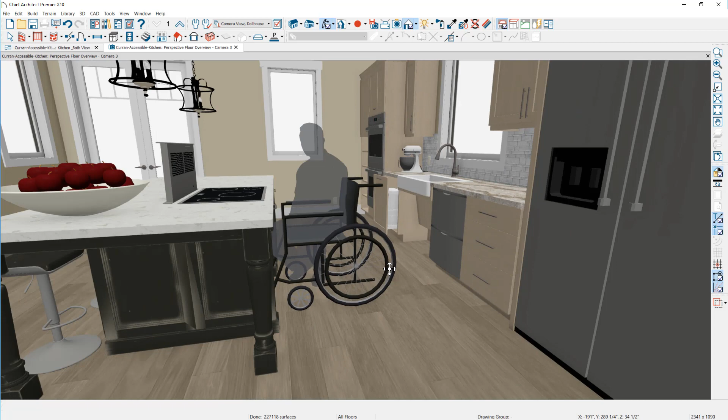In this video I'm going to cover the process of creating an accessible kitchen that meets the National Kitchen and Bath Association's accessibility guidelines. The ADA covers commercial guidelines but not really residential guidelines, so I'm using those available from the NKBA. There are three important areas for this kitchen that I'm going to focus on.

First is knee clearance for both the sink and the cooktop. Next is creating a wide aisle with a turning radius. Let's get started with a new plan.

Now that I have a new plan open, let's review a few of my settings here. First, I'm using the NKBA annotations available through the drop-down. Next, I'm using the layer set for kitchen and bath. And finally, I'm using my saved plan view for kitchen and bath.

The saved plan view that ships out of the box of the program controls both your layer set and your annotation set. So let's get started by using our exterior wall tool.

I'm going to come in here and just create the shape of our design. I'll right click and create a rectangular room. You'll notice the wall fill layer is turned off in the kitchen and bath layer set.

Once I'm finished, I'm going to select inside of this room, and notice in my lower edit menu down here at the bottom there is a feature called the automatic NKBA dimension tool.

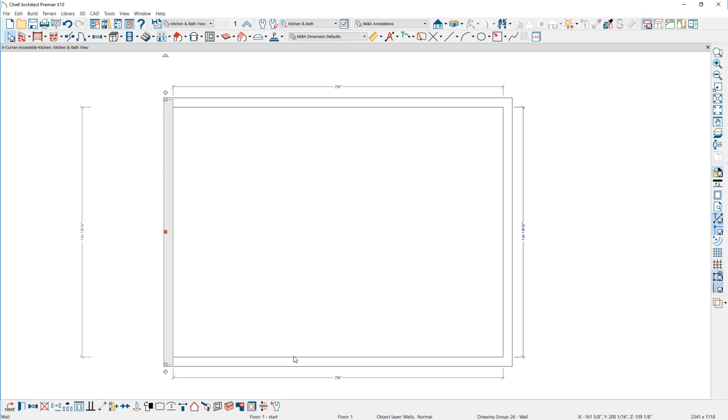These dimensions go wall surface to wall surface. I'm going to select one of the walls on the side here, highlight the lower dimension and type in 256 for inches. Then I'll come over here and select the lower wall, select this dimension, and put in 203.

Once I have my dimensions in place, I'll just refresh my dimensions by using that same tool, and now I kind of have the space that I want.

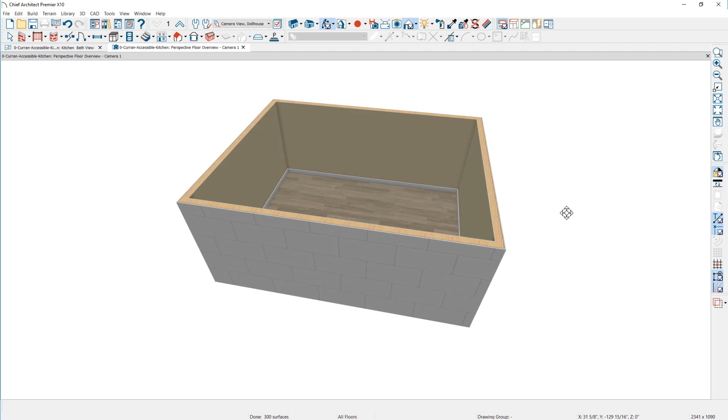You could take a 3D view and let's take a peek. When you take a 3D view, these are going to use the defaults you've set up for your plan. Notice that the exterior wall type is of a certain color and style, as is my interior floor coloring and walls. I'm going to go ahead and place my doors and windows while I'm in this view.

Let's place a window off to the side over here. I'm going to place one for our sink right in this area. One more off to the side over here. And then finally I'm going to place a door back in this back wall.

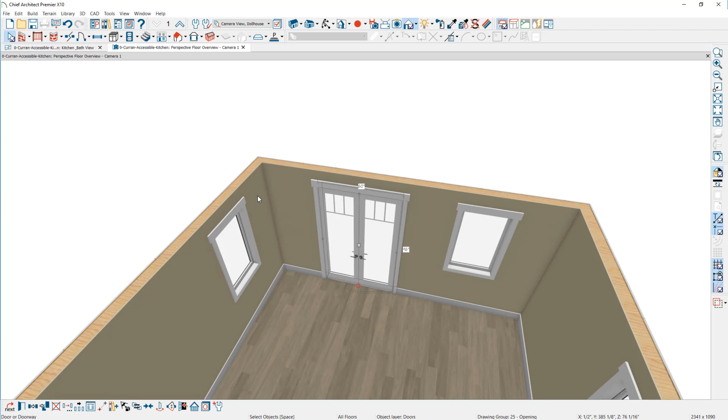We'll just use our door tool. I'm going to click and place the door, and I'm going to make this a little bit wider, at maybe 60 inches. Now I'm going to return back to the plan view and let's finalize our dimensions for those objects.

The window on the lower wall is going to be our sink window. I'm going to make some adjustments to the width and the height, so I'll set this to be 48 by 54. Once I have that adjustment, I'll select inside the room and update those dimensions.

Next, I'm just going to move my way around in a circular fashion and update the dimensions for each one of these objects. I'll click on the window and then put in the value for the dimension, and just work my way around.

For this dimension, I'm going to set this to be 51 3/8, and for the door I'm going to set this to be 48 inches from the window. And finally, for this window over here, I'm going to set that to be 9 inches.

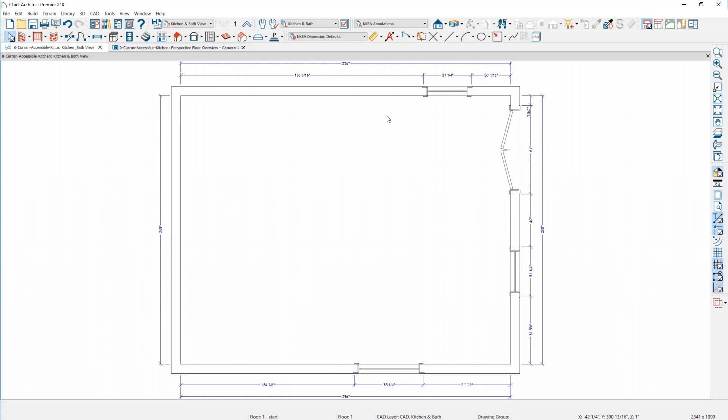So I have most of the dimensions for the room. One of the things I like to do if you're just going to be doing one wall or maybe two walls is temporarily create a view in here.

I'm going to use the break wall tool, which you'll see in the upper menu. I'll create a notch somewhere along this wall right in here, then select these two walls and mark them as invisible. That way when I take a 3D view you won't see those two walls, and it makes it very easy to look inside the design.

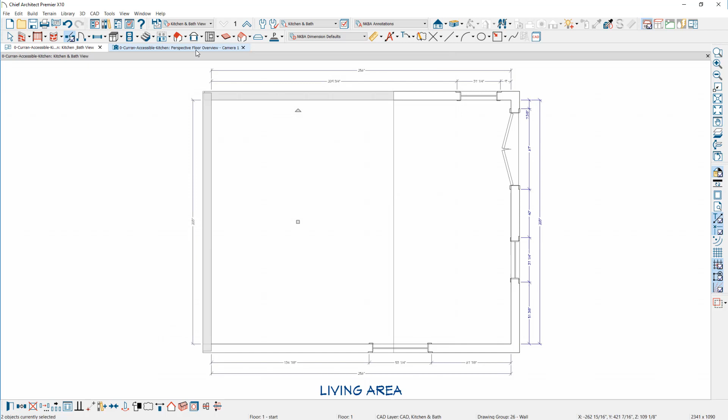Let's go back to the 3D view here. Now you can see this space, and we can zoom right in and begin our design work. I'm going to begin the design work in this perspective view.

A lot of times I'll work in a plan view and elevation view, but this is an easy way to start the process. I'm going to begin with placing a full height cabinet right in this area, and slide it up against the wall until it bumps. Next I'll double click on that and make some modifications.

On the general panel, I'm going to mark the width of this to be 21 inches. Press the tab key so you can see it update. Then on the front of the cabinet, I'll click on the lower face item.

I'm going to change this from a door to an opening. Then on the upper door, let's change that from an auto right to an auto left. And I'm going to set the item height to 34.5 inches.

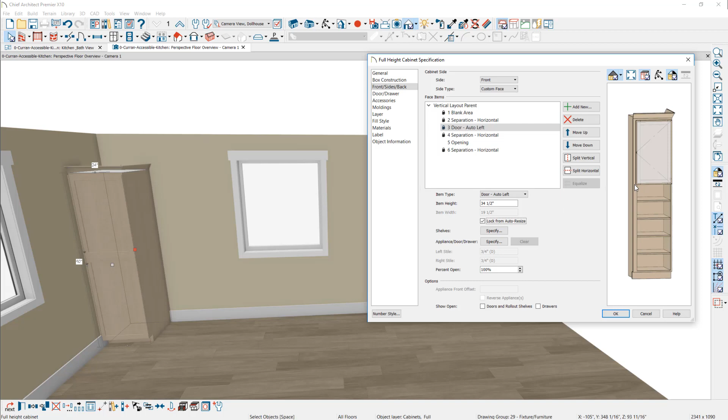That way it's going to line up the bottom of it with a few of the wall cabinets I'll place here in a minute. Just go ahead and bump that back against the wall. I'm going to place one more full height cabinet that will be used for our double oven.

Go ahead and click on that. I'm going to resize it to 30 inches. On this cabinet I want to make a few changes. First, I'm going to change the upper drawers.

Let's go ahead and set this to be a dimension of 23 7/8. Press the tab key so you get a preview.

On this lower face item, I'm going to split this horizontally, and the center one I'm going to mark as an appliance. Let's go ahead and change that. Then on the item height, I'm going to put in the specs for the specific appliance.

These are the finished dimensions typically. Also make sure that you lock this from resize, because we do not enforce any of the settings for specific appliances, so it's your responsibility to use the spec sheet and the finished dimensions for this.

On the item above it, the separation, I'm going to change that to a blank area, and set that to be 3 inches. Finally, on the lower section at the very bottom, I'm also going to make that a blank area. There's really no reason for the separation in this area or this area, so we'll simply remove those.

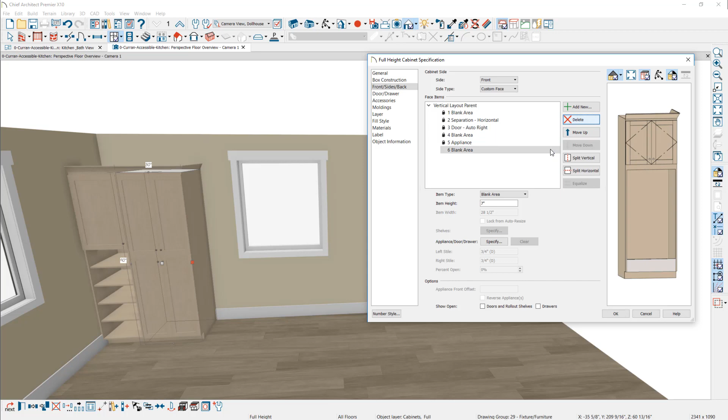On the appliance, I'm going to browse out to the library and look for the Wolf Double Oven that I'm after. I'll scroll down and look for the Wolf catalog. Let's scroll down a little bit further.

That should be under the Wolf Cooking section for ovens, and I'm going to use this built-in double oven, and now you can see the preview.

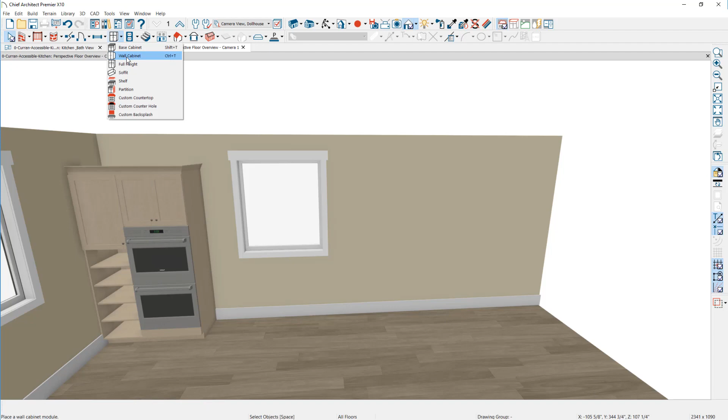Now the next cabinet that I want to place is going to be a base cabinet, so let's go back into the menu. We'll choose our base cabinet, and I'm going to place the 24-inch cabinet in here. This is going to be a pull-out for our trash container.

Let's go ahead and open this up, and what I want to do in this case is simply click on the drawer, press delete, and with this pull-out, change that to a drawer. So I'm going to choose the drawer option in here. When you do this, let's go ahead and close the dialog.

Notice that it's going to use the slab style drawer that we have as our default. So I want this to be a face frame. If I were to place one more cabinet over here, I want it to have the face frame style of the door itself, but I want to be able to show this open as a drawer.

So in this case, what I'm going to do is open this cabinet up and make the changes.

So on the drawer component, I'm going to come down to specify for the door and drawer, and I'm just using a simple frame drawer. Let's go ahead and choose that option, and now you'll see the hardware in here.

I need to move that up, so I'm going to change the vertical position. Let's move that down maybe 1.5 inches or so and see what it looks like in the preview. I typically press the tab key so you can see what that preview looks like, and now I'll close the dialog.

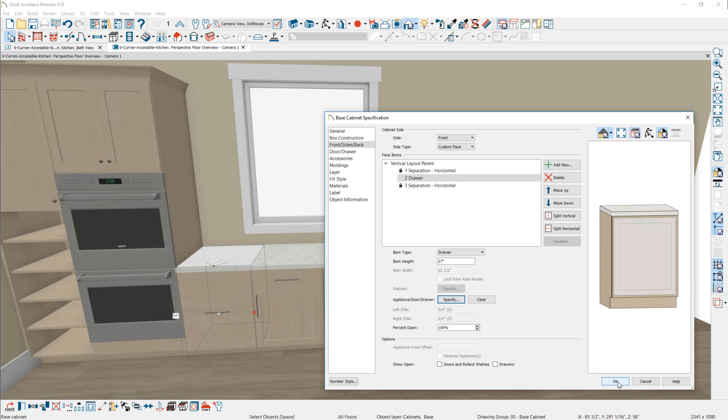So now one more setting. Let's go ahead and click on the cabinet. You can open that drawer down in the lower edit menu, you see open cabinet doors, and now we can kind of rotate around.

What I want to do in this case is insert a trash pull-out from the Rev-A-Shelf catalog. So let's go back into that cabinet and make that change. I'm going to go ahead and select the drawer.

By the way, if you want to change the percent open, let's just change that to 25%. You can rotate around in the dialog and kind of see the way that's going to look. Maybe we'll increase it to 40%.

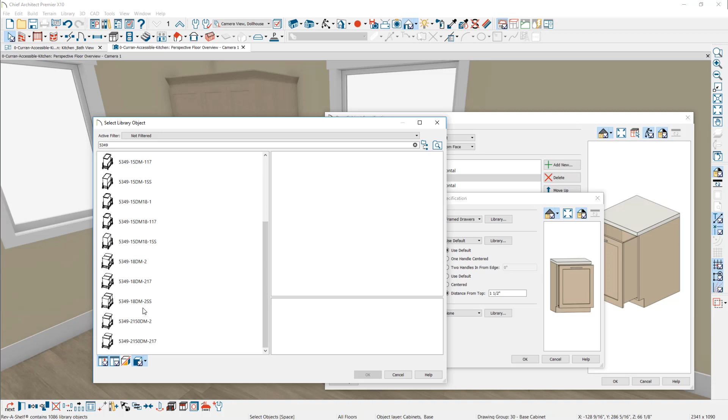Let's go back into the specify option, and down here at the bottom I'm going to choose the library option and go into the Rev-A-Shelf catalog. As we come down, you find the catalog, and I happen to know the part number, so I'll type it in up in the search criteria: 5349. Then I'll scroll down, it gives me a list of a handful of these, and I'll choose the one I'm after. See the preview of it.

Let's go ahead and close the dialog, and again it will replace inside of the box, and then when you close the dialog, you can now see that trash container being open in that area.

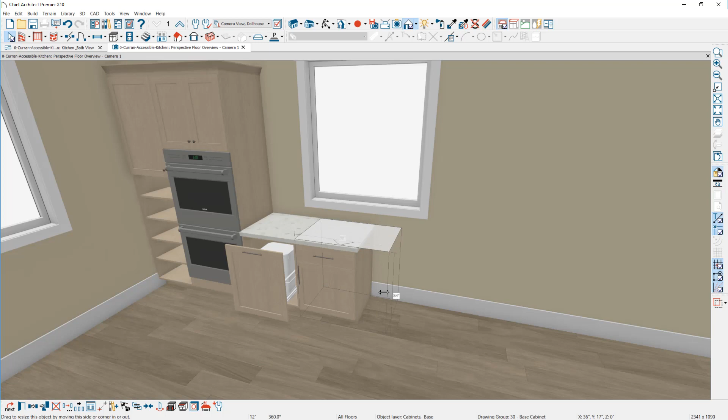Now the next cabinet we're going to place is going to be our sink base, and I'm going to make that a separate video. If I were to reserve a space here of 36 inches for that cabinet, I'll open up the library and place my cabinet in this space in just a second.

Let's place our dishwasher cabinet off to the side, and I'll come back here and delete the sink base. Alright, now I'm going to open up the library and grab this accessibility sink.

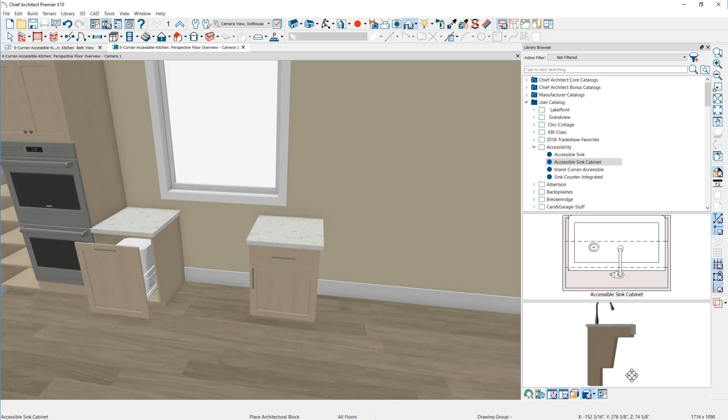Now I've created this and I'll show you how to create this in a separate video, but you can kind of see the profile of this if I zoom in a little bit. What this does is it allows you to have 27 inches of space for your knees, and then there's an access panel for the plumbing fixtures, and then your feet actually have room with a wheelchair to get right underneath of here.

And if you look at the details here, this just kind of reiterates what I just covered. But this is a section view of that sink, and I'm going to do a specific video on how to create a sink that will look like this.

And then what I've done here for this video is I blocked that particular object, added it into my accessibility folder, and then I can reuse this and make modifications to it as needed for future designs or videos. So I'm actually going to place this sink in my plan view.

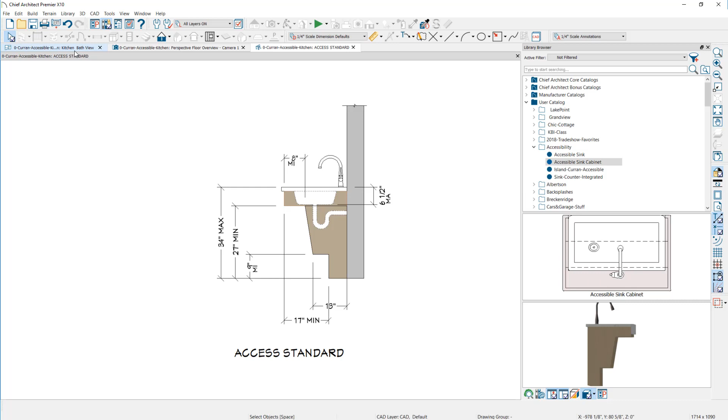Let's return back. I'm going to grab that sink and place it right in this area here. Now in Chief Architect, that's called an architectural block, which consists of the sink, the cabinet, and maybe a few other components that I've used on the lower section of this.

A lot of times what I want to do is unblock those so I can get more accurate dimensions down to those component levels. So I'm going to click on this tool in the lower edit menu. It looks like an explode block button, and now that becomes individual items. I'll just pull it out, re-block it, and slide it up against the wall.

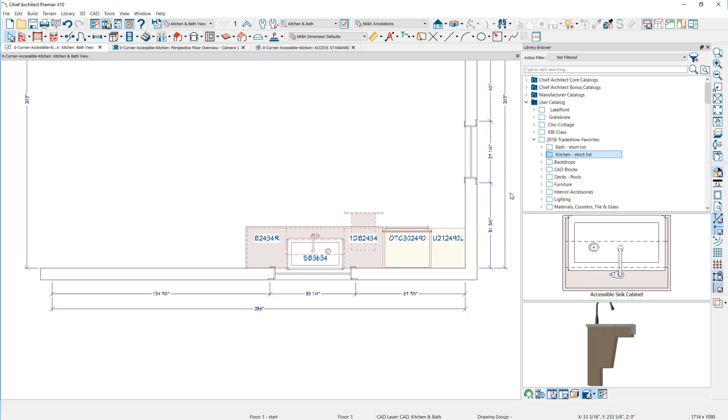And while we're in the library, let's go ahead and find our dishwasher. I have a favorites folder in my kitchen short list. A lot of times I'll work that way with my favorites, and I'll replace the box with the dishwasher over here.

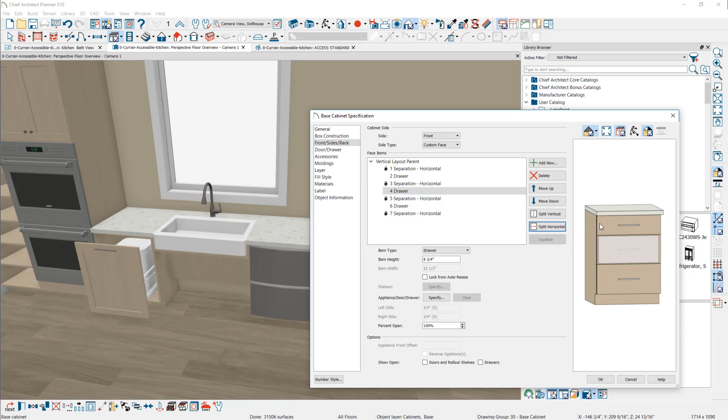Next, let's go back into the 3D and finish up in the kitchen. I'm going to place a cabinet on the other side of the dishwasher, and I want to make this a 3-drawer bank cabinet. The easiest way to do that is to select on the front of this face item, change that to a drawer, and then use the split horizontal feature.

Next, I'm going to grab the partition for the refrigerator, and slide a partition in here. Let's go ahead and slide our view over just a little bit. We'll bump this partition against the cabinet.

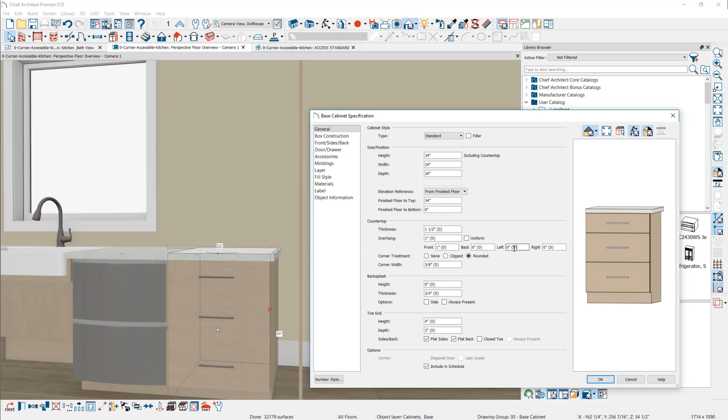Something you may want to do if you look at this cabinet is to trim off the countertop edge. If you're going to do a countertop plan, let's trim that countertop off on the side over here. If we rotate around on that cabinet, you can see the side we're after. You'll find that setting under the general panel underneath your countertop. You can select uniform, and maybe set this to be 0 on both the left and the right specifically, and then you'll see that trim off on the side.

Now I can grab that partition and we'll just slide it over and bump it into place. Now let's make one change to the partition. I want to set this to be 1.5 inches, and I'll have to rebump it then. Let's slide it over and bump it into place now that it's 1.5 inches.

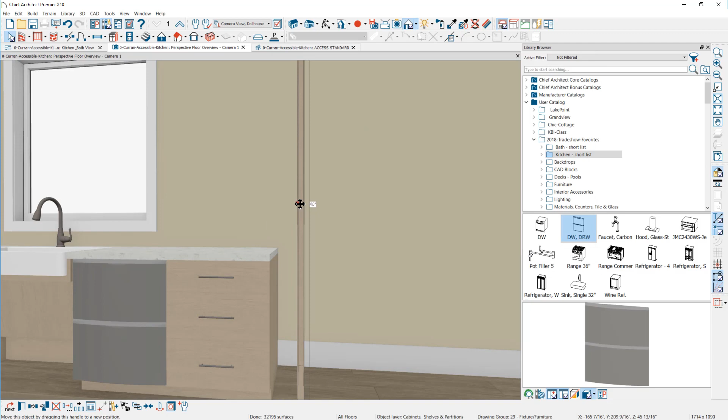We'll zoom out, and I'm just going to grab one more copy of that using the copy command. We'll slide that over here, and then grab a refrigerator out of the library, place our refrigerator in here, and then bump the refrigerator against both of the partitions.

And then the final thing with the base and full height cabinets, I'm going to grab this cabinet clear off to the right. Let's create a copy of it, and I'm going to paste one over in this area, and then I'll just bump that over, and then I'm also going to change the door to be the other hinge side. So we'll just change that from an auto left to an auto right.

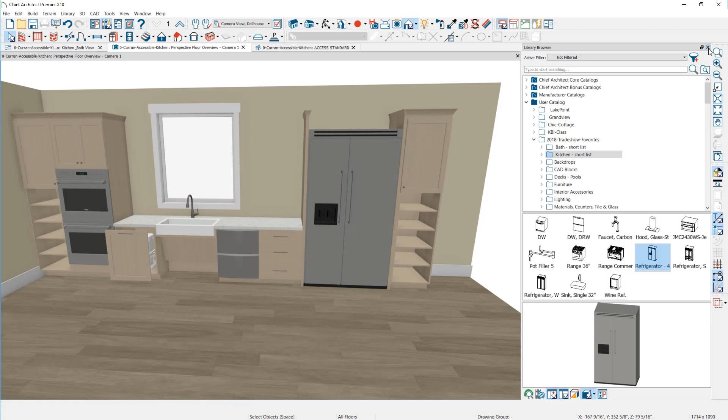Okay, next let's close our library browser down, and what we need to do now is place a few of the wall cabinets. So let's grab our wall cabinet tool. I'm going to place a wall cabinet on this side. I'm just going to resize this to about 9 inches, and then we'll make sure that the space in between the casing and the wall is exactly the same. Based on that gap, we can probably make that 12 inches.

And again, whatever this dimension is when we do our wall elevation, I like to use the copy in the lower edit menu, and then the reflect about, which you'll see in the lower edit menu. And then we can come into the window or the sink, and that's going to give us the exact same space along with that window reveal.

Let's go ahead and bump this over to the partition, and then the final thing is to place a wall cabinet above the refrigerator. Let's grab our wall cabinet, and again, this is a little bit tough to do because it's impeding in the refrigerator, but we'll just click and place it. It's going to give you a message saying it's going to conflict. We'll go ahead and ignore that.

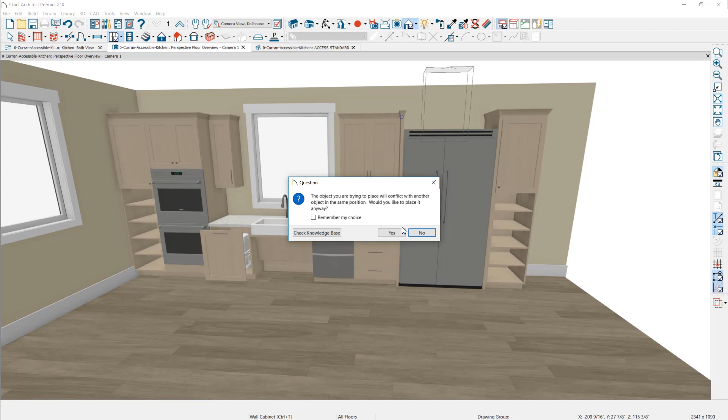What I want to do is bump that to each side over here, and then we'll go in and make some modifications to this cabinet. Let's go ahead and pull it down. If you're ever curious, you can open up the adjacent cabinet, and on the general panel it says finished floor to top is 90 inches. So let's make sure when we make our modifications to this cabinet that it's exactly no further than 90 inches from the floor to top.

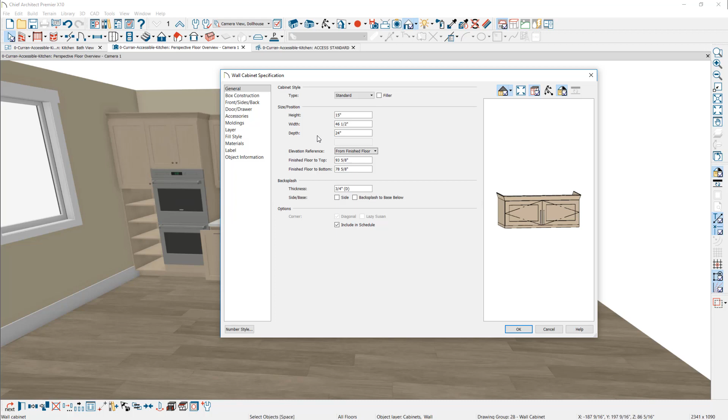And what I want to make sure to do is go in and set the height and the width. First, on the depth, let's change that to be 24 inches, or refrigerator depth. We'll leave the width at 46.5 - that's the size of our refrigerator that we put in there, bounded by the partitions.

And then on the height, I'm going to set that to be 6 inches. Now on the floor to top, let's go ahead and put our 90 inches in there. Press the tab key so you can get the preview update.

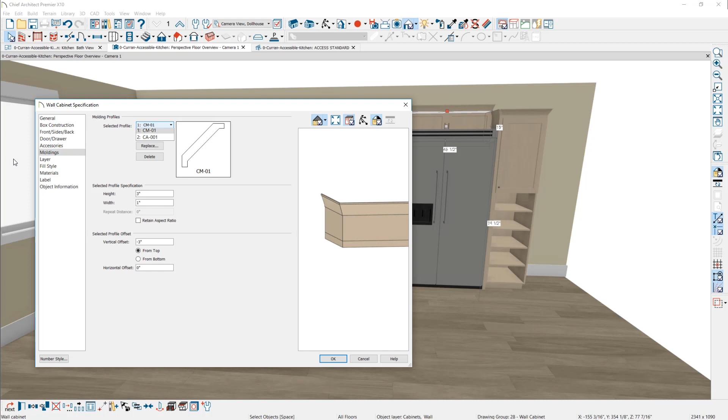And next on the face item, I'm actually just going to remove this altogether, and now I just have a blank area. Then I'm going to get rid of the light rail down below by going to the moldings panel, coming down to the second molding, and just pressing the delete key.

Now the final thing that I'll do in this view, I always leave my backsplash off the base cabinets and off of the wall cabinets. I use the built-in backsplash tool using the custom backsplash. Click on the wall, and that way you can come in here and adjust this to whatever size you need in this case.

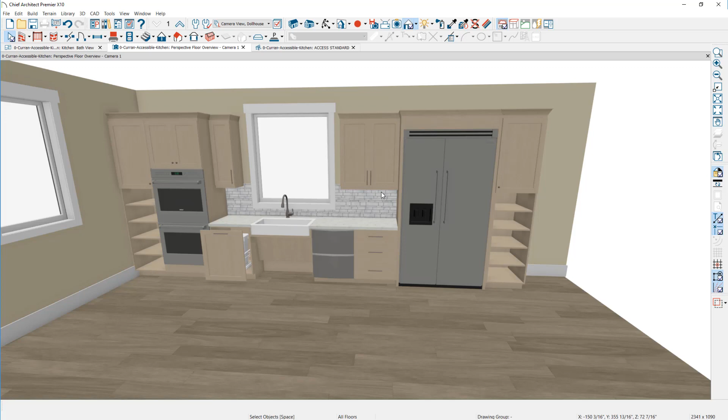And now we can go into the wall elevation and do our dimensions. From the plan view, the tool that you're looking for to just isolate the wall itself is the wall elevation tool. Click and drag through the wall.

Now when you take a wall elevation, your typical camera style is going to be vector style. Sometimes I like to be a little bit more artistic and switch that style to the technical illustration. It gives you a slightly different view.

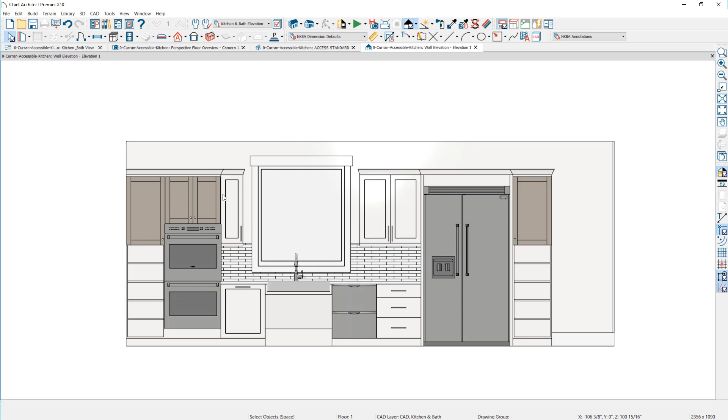Now I wanted to create the dimensions for this view, and what I want to make sure is, one, my dimension defaults are set to the NKBA dimension defaults. That's an out-of-the-box dimension default, and that's one I want to make sure when I use the next tool, which is for the automatic NKBA elevation dimensions. This is going to do a pretty good job of placing our dimensions.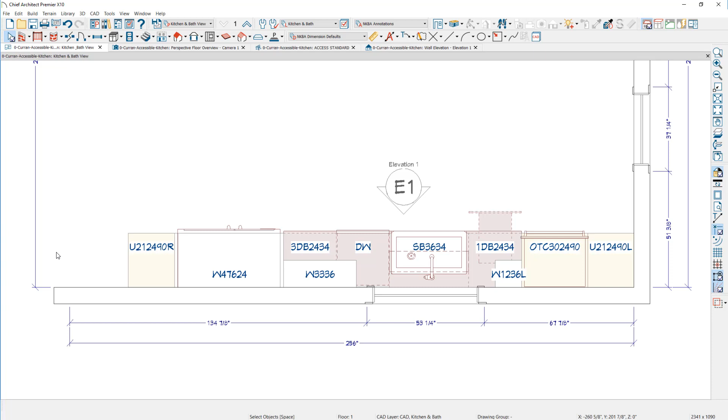Notice that at the top, 265 1/4 does not match the number that we put in from the floor plan. If you go back to the floor plan, it's actually 256, and the reason is because we removed and made this wall invisible. That's okay for the purposes of this video, but if you're trying to be exact for your wall elevation and they don't match, and you've done what I've done here in setting that wall to be invisible, it's going to the outside of that wall in this elevation that we just created.

Now typically with the automatic dimensions that we just placed, I usually do clean up and make modifications to them. I'll do this in a circular method where I'll start on the left, move around to the top, the sides, and the bottom.

The way I usually do this is I'll click on the dimension, and if some of these dimensions are not relevant for what you want, you can go through each one. If we zoom in a little bit, each one of these dimensions will show up with an indicator, a little diamond showing where they're at, and you can easily grab these diamonds and pull them off if there are certain things you don't want. So I'm going to go through here and pull these little dimension markers off, since I just don't need this level of detail for this side.

Notice that it actually went to the oven, so sometimes you have to pull it off to the side. I'm going to go ahead and slide these off, and we come up to the upper portion. Again, it picked up the window on the side, and I don't want that. I've been able to clean up the side based on what I need.

Notice that the default cabinet I'm using is 34 inches in height. Again, if you look at the access standard, typically your countertop is not recommended to be in excess of 34 inches. Come around the top.

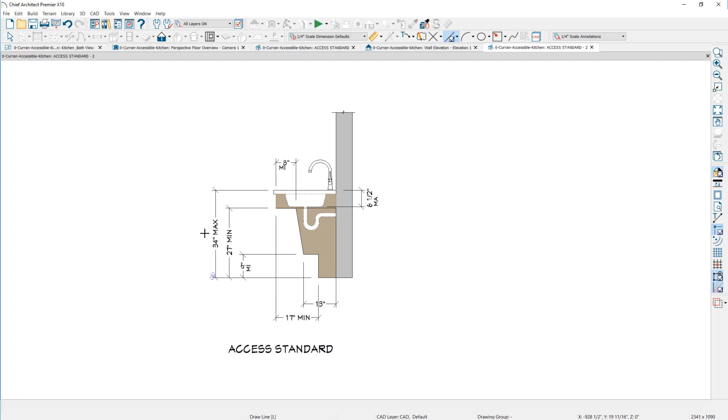Remember when we copied that cabinet around, we actually have the same dimension at 4 7/8. I'm going to delete this center line since it's going to be repeated at the bottom, and then I'll just go ahead and pull this dimension down.

And let's come into the bottom and take a look. So there's our center line dimensions that we need, and then off to the far side, if you want to clean this dimension up to be a little bit different, you can use the same approach that I used on the other side.

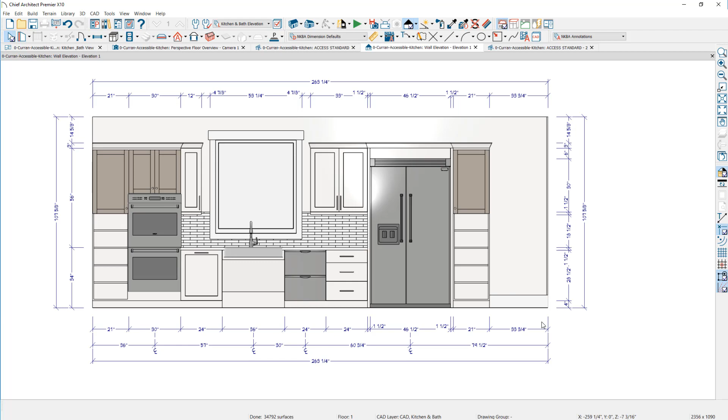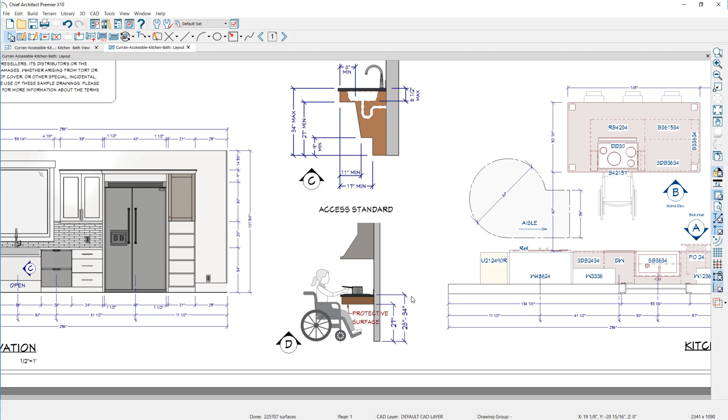Now as I get ready to place the island, one of the things that's really important is to make sure you have the accessibility and knee clearance, just like with the sink. If we zoom into the layout, I've used this accessible standard. Recommended height should not exceed 34 inches according to the National Kitchen and Bath Association.

The clearance down here needs to be in the 27-inch range. You can see the 3D rendering of the island we used - that'll be under a separate video where we create this island. I placed this island using an induction cooktop according to the manufacturer. Shielding underneath is typically not required; they suggest ventilation through the back part.

Let's go ahead and place this island as an architectural block. I'm going to do a separate video to show you the process of creating the island. We'll place it into the design here and dimension it. So let's go back into the floor plan view and go through those steps.

Now I've created a folder for accessibility items for this video called Accessibility. You can see the island I've already created and blocked, and I'm just going to grab that and place it into the design. As I place that island as an architectural block, I usually explode those blocks in the lower edit menu to give more refined control over being able to dimension to it.

Now I'm going to use my end-to-end dimension, and come in here to create a dimension to the countertop. I may need to adjust that slightly so I have my countertop-to-countertop edge. Then I'm going to draw a marquee around the entire island.

In this case, I'm going to use that dimension and put in 60 inches. I'll go ahead and expand this dimension. Let's go ahead and use the extra diamond, and we'll pick that up on the edge over here.

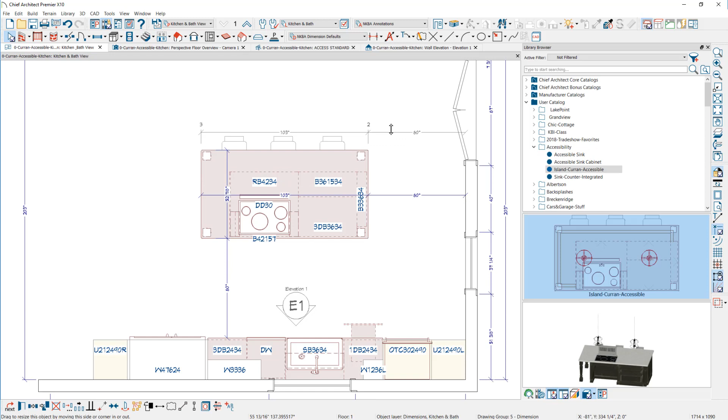Then I'm going to run another end-to-end dimension from the wall over to the countertop, and add one more dimension to the end of the countertop. Again I want to draw a marquee around the island, and set this dimension to 60 inches as well. Then I can adjust these dimensions where I'd like to have them in the plan view. So let's just slide this out off to the side.

Now I have the dimensions, and the next thing I want to do is create an elevation view for my island. Oftentimes when you do a wall elevation, let's go ahead and cut a wall elevation just through the island here. The wall elevation is actually looking for walls, so you're going to see the wall behind the island.

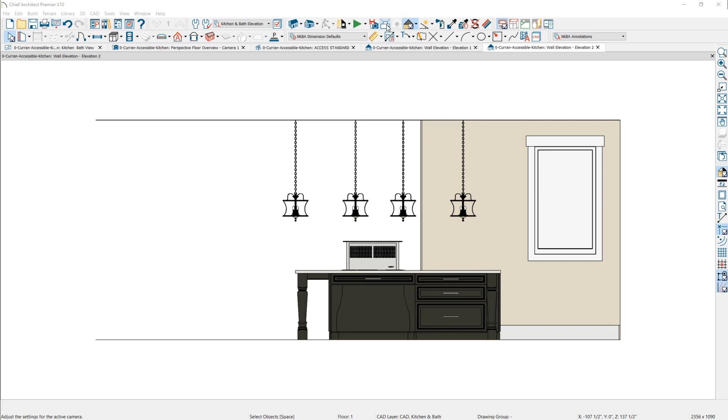If you want to backclip that, you can edit the camera either in the plan view or in the 3D view. Let's click on this tool called Edit Active Camera, and first I'm going to call it the Island Elevation tool. There's a setting right here that says Backclip - let's go ahead and check that.

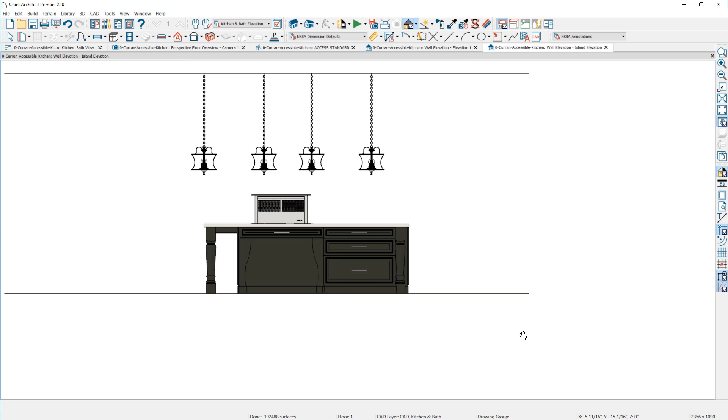By default, it's going to be the distance you drew the camera. Then in the plan display, let's rename that to Camera B. What that's going to do is reset your camera so you don't see the wall behind it - it's a very clean look, and now you can do your dimensioning in this elevation view.

Like I did on the main wall elevation, I'm going to change my camera to the technical illustration style to give us a bit more color. The automatic NKBA dimension tool will not work without a wall in this case, so I'm going to need to use my manual dimension tools.

The first thing I'll do is use the end-to-end dimension, and create an end-to-end dimension. Notice that it's only going to pick up the center of that leg, so I'm going to slide that out to the end of the countertop, and also slide it out to the end of the countertop on the other side. Now I have my end-to-end at the 103 that you saw in the plan view.

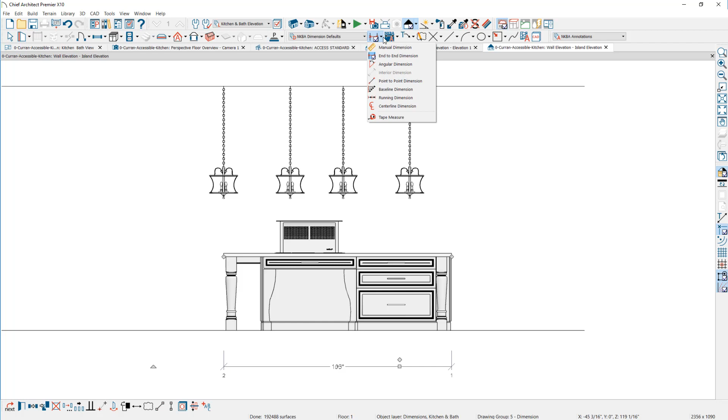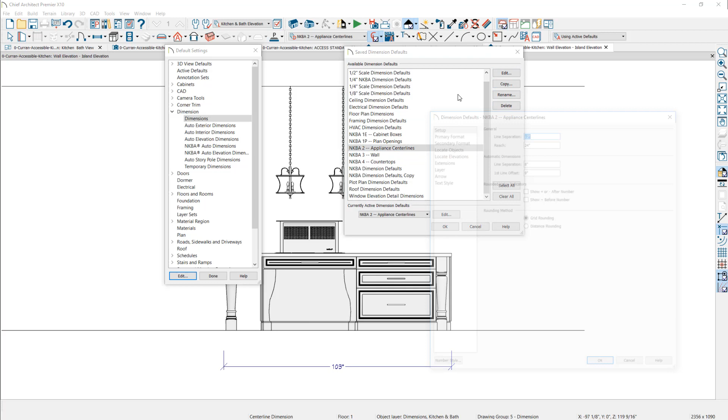Next, I'm going to switch my dimension tool to the center line, specifically my dimension default for appliance center lines. Let's explore this dimension default and take a look at the settings. Under dimension defaults, in the edit panel, I have a specific dimension that's only looking for center lines, centers, and that's the only thing checked besides my wall surfaces.

When I use this dimension default and run this center line, we can pick up the center line. It's also going to pick up the center line of the millwork. Let's pull that off and put it onto the end of the countertop, and I'll do the same on the other side. That gives me the center line for that appliance.

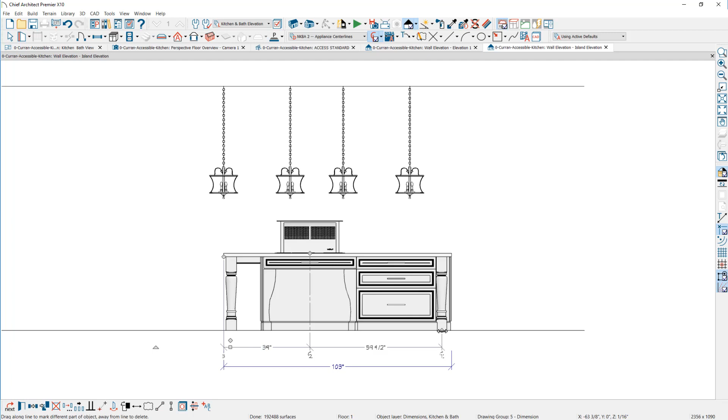Clearly if you're going to the outside of the wall and showing that, you could drag that dimension onto the wall itself. Once I'm finished with the center line, let's change this back to the regular manual dimension tool and back to our dimension default for the NKBA.

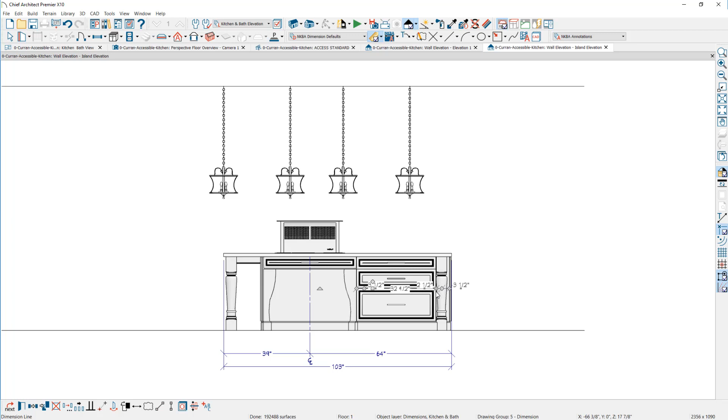I have quite a few components in here with a custom leg made out of CAD. I'm going to run a few dimensions in here. It's going to be easier to clean this up by selecting this dimension, pulling it down, and then simply adding and subtracting. It picks up the center of the legs.

I'm going to come in here and just add the dimension. It's picking up a few of these items, so I'm going to pull these off and clean them up. With the extra diamond on here, I'll slide this over to the edge at this point. I'm going to pick up those feet, so we'll put the dimension over here, and one more on the foot over here.

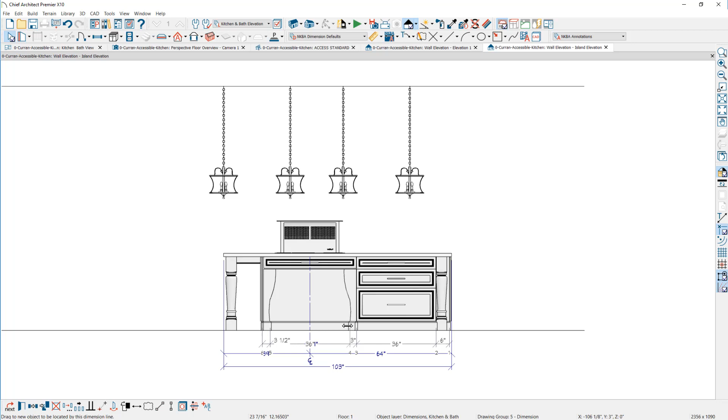Let's zoom in and figure out what we're doing. I'm going to pull that right onto the leg, and each time you click on this it gives you an extra diamond. I have an extra half inch for the reveal on the door panel, and then we'll pull this over to the edge of the foot and also onto the edge of the countertop.

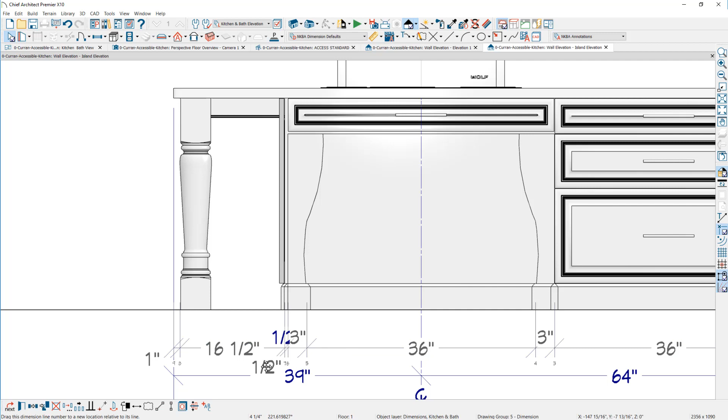There's a lot going on with the dimensions in here, so I like to click on these and pull them off so they're readable. There's a little move handle right in this area. I'm just going to pull my center line dimension down so you can take a peek and get it cleaned up.

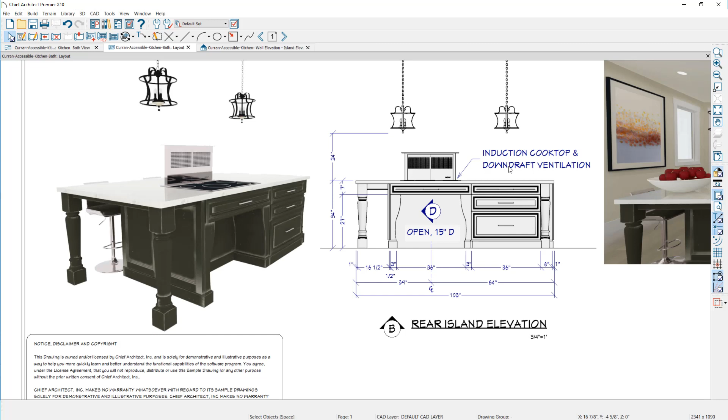Once I have the dimensions put in place, I can send this out to the layout sheet, which if I open that up you can take a look at here. You can see I added dimensions going in the vertical direction over to the pendant light. I just drew a CAD line in here so I could get my dimension for that light. And then I put a text object in here for the information on the ventilation and the cooktop for that induction cooktop.

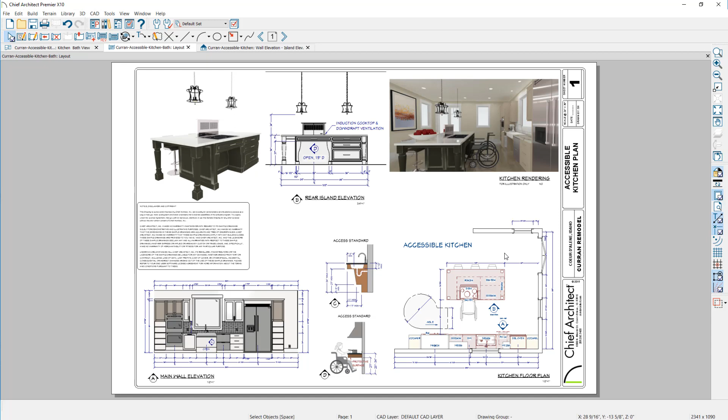If I zoom out, you can take a look at the entire set of plans I put together for this kitchen: the wall elevation down in the lower left-hand corner, my accessibility standards, and then the floor plan. I've created the entire sheet on a 24 by 36.

Let's go back into the plan view and take a 3D overview. You can see the final plan where I put the wheelchair in here, the accessibility underneath of the island, underneath of the sink. And again, being able to use the invisible walls allows you to see the entire scene.

Well, that's it for this video.